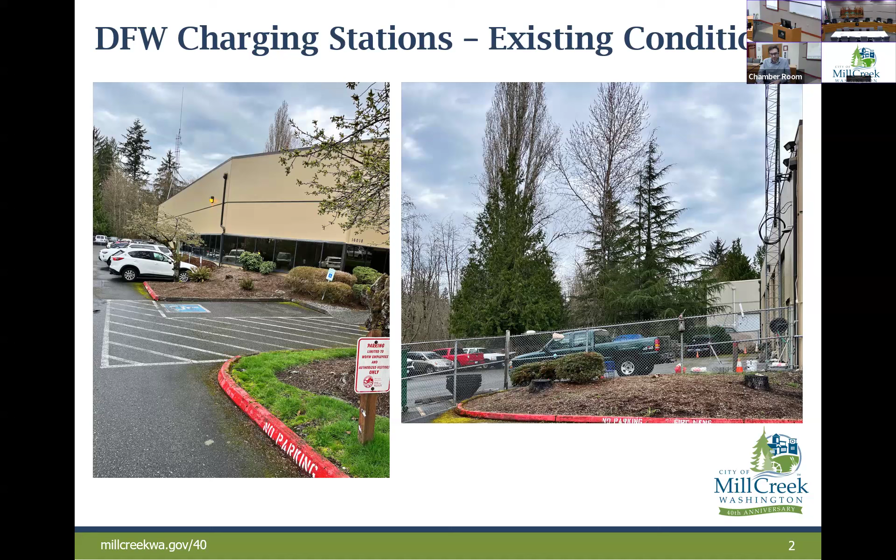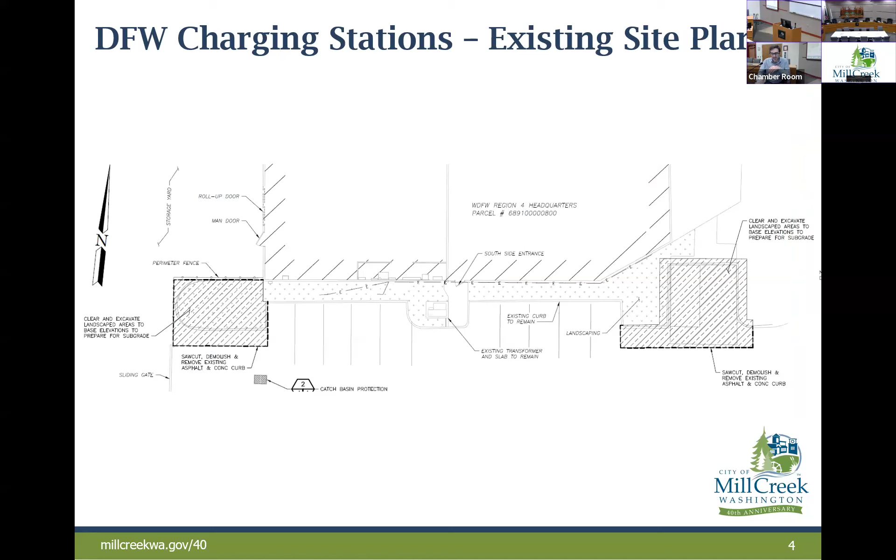Here's some photos of the existing conditions on site. And then here is the existing site plan, and it shows that the hashed areas are areas where the existing landscaping or parking spaces are being modified or removed. And here's what the proposed site plan is going to be. You can see they're adding 3 new parking spaces where the landscape bulb was on the left or west side. And then adding the EV charging ports.

So staff recommends approval of the landscape plan in accordance with MCMC section 17.34.040H and as conditioned in the staff report. In the staff report, the conditions are as follows. 1, the landscaping shall be portrayed on the materials submitted with the application, except as modified below and by the conditions imposed by the design review board. 2, required perimeter setback areas and parking lot landscape islands shall be densely landscaped with a combination of trees, shrubs, and ground cover. Provide 90% coverage within 3 years of planting per MCMC section 17.34.040H2.

And 3, per MCMC section 17.34.040H2, a tree is required for this project. The code mandates that one tree be provided for every 4 parking spaces in surface parking lots. The tree may be planted on the perimeter of the parking lot to meet this requirement. So if the DRB agrees and conditions their approval with those conditions listed, the applicant will be required to demonstrate on the landscape plan that there will be that densely landscaped, that 90% coverage within 3 years of planting, and 1 additional tree will be planted on site for the extra 3 parking spaces.

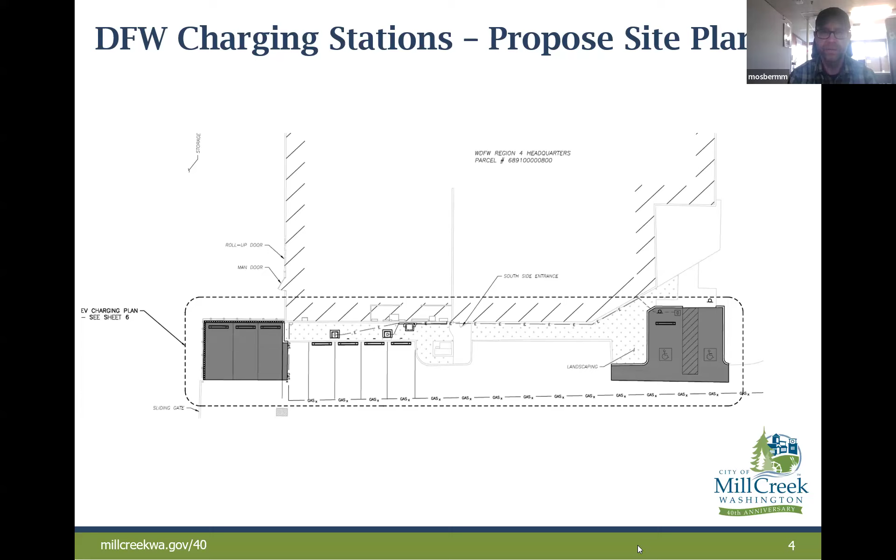I can answer that. This is Ray Mosberger. Sorry, that was an unintentional mistake. That should show parking stalls there. We can update that for you. Yeah, we would be happy to update that for you. It should show 3 parking stalls there.

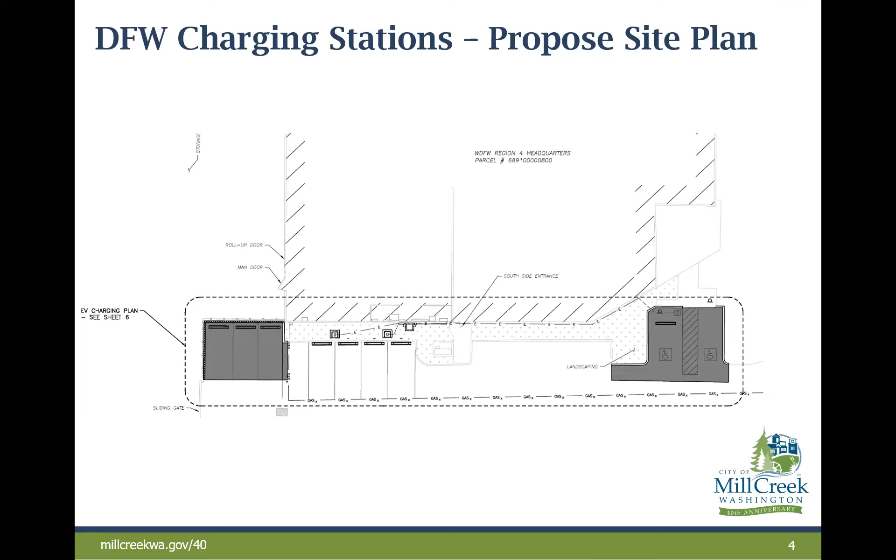Okay. And the report that came with this said that there was a new transformer that's required for these EV stations, and that landscaping screening would be provided, but I don't see where that transformer is, and more importantly, where the landscaping to screen it is at.

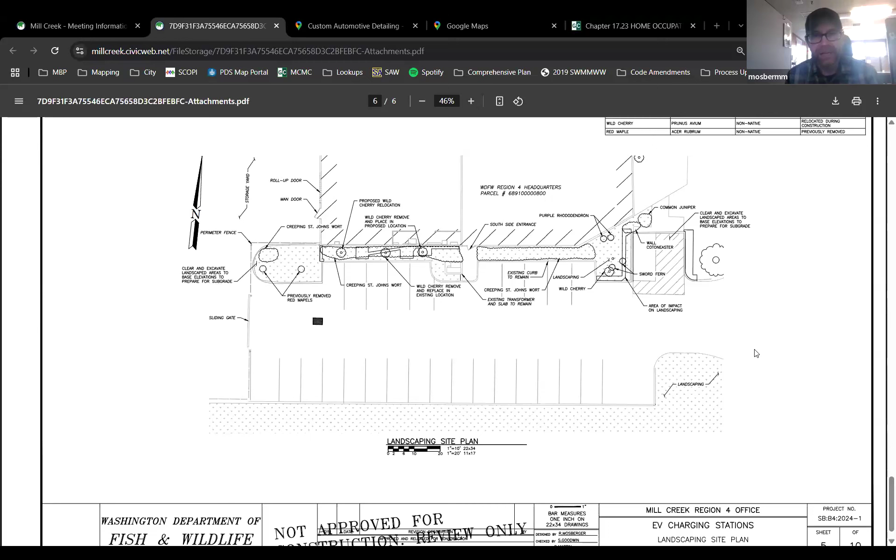Yeah, it is near the existing transformer. Actually, it's not shown on that plan. The plan that's shown right now, you can't see it either. But yeah, we can update that also.

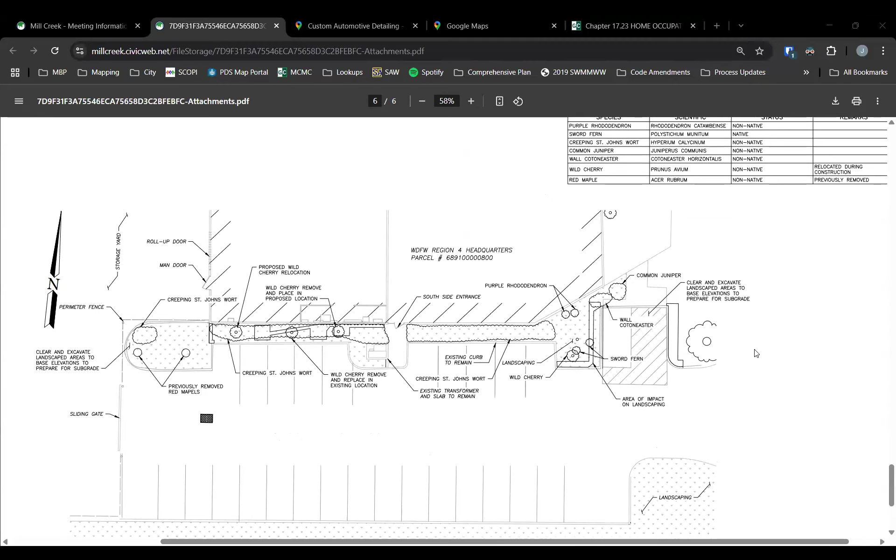There's 2 transformers. There's an existing transformer, and there'll be a new transformer set behind that one, closer to the wall. It shows up on the plan.

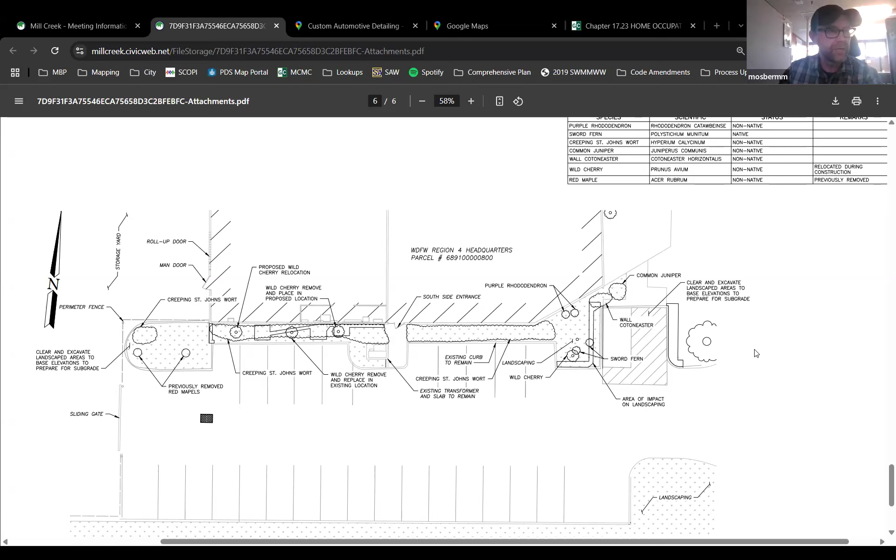I'm sorry, I have a new computer set up, so I'll pull up the plans quick. Is it on sheet 5? Yes, I have 2 5s - there's a 5 of 9 and a 5 of 10. I'm on the 5 of 9. Okay, so 5 of 9. Oh, okay, I see it there.

Okay, so it's the one up against the building. That's the new transformer. Correct. Okay, and then those are the charging stations that are up close to those parking blocks. Yes, correct. Got it. Okay, so then looking at the landscaping plan, that makes sense then. So you have some shrubbery going in there. Yes, got it.

One thing I wanted to ask the group how they felt about this - there are 2 previously removed red maples, and the report said they're not sure when this happened. As part of the densely required landscaping for this project, can we go ahead and make that 3 trees instead of just 1, and replace those 2 red maples that were removed?

That's acceptable to Fish and Wildlife. Okay.

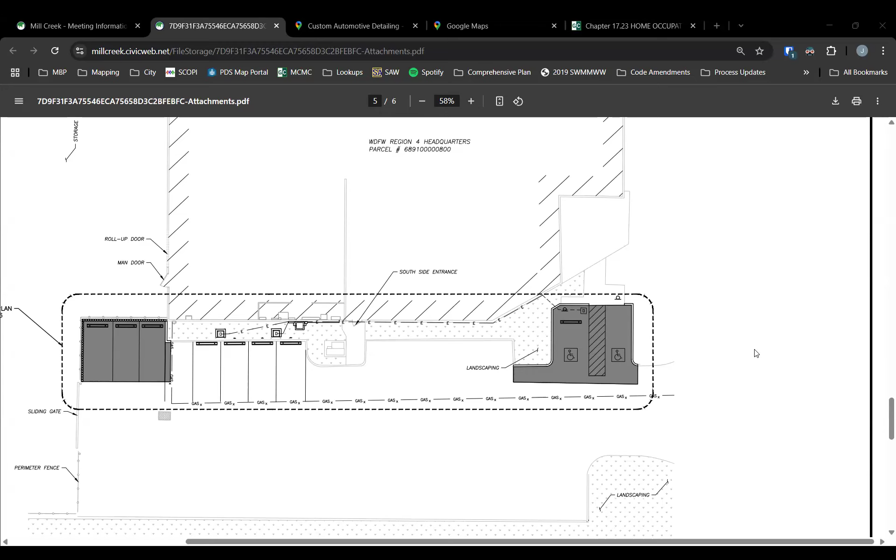On behalf of Fish and Wildlife, we apologize for that. Somebody in our maintenance crew wasn't aware there were permits to be pulled, and they're aware now. We just wanted to be upfront and you to be aware that we're trying to make things right too. Appreciate that. Thank you.

All right, are there any other comments from the board? I just had one comment - my question was about not aligning all the new parking with the existing parking, but I see that there is a sliding gate at the end of the driveway, so that's maybe why. My suggestion would have been to align the new with the existing and continue this landscape. I don't know if it's feasible to relocate the gate, probably not. So that was my only comment.

I can also speak to that. It's a very tight parking area. What's not shown in this plan is that there's parking on the other side of the curb, and there's a pretty narrow aisle there. So we're trying to squeeze all the parking - we're not trying to make it a huge paved parking lot, but we're trying to squeeze in what we can to get all our people parked there as possible.

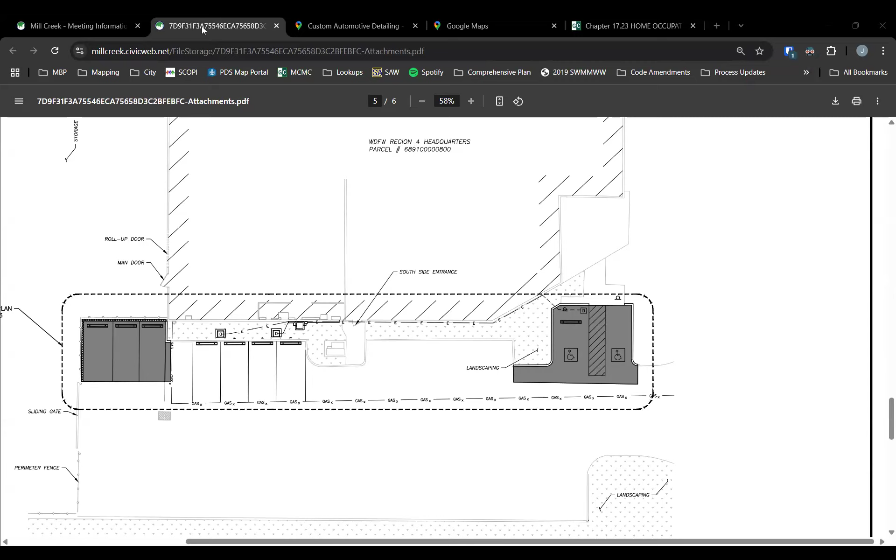Do we have anything on the docket for next month that we know of yet? I am not aware of anything. But the deadline for next meeting has not passed, so I'll have, when Silver returns, I'll have her send out an update if there's anything for next meeting. Okay, perfect, appreciate the update.